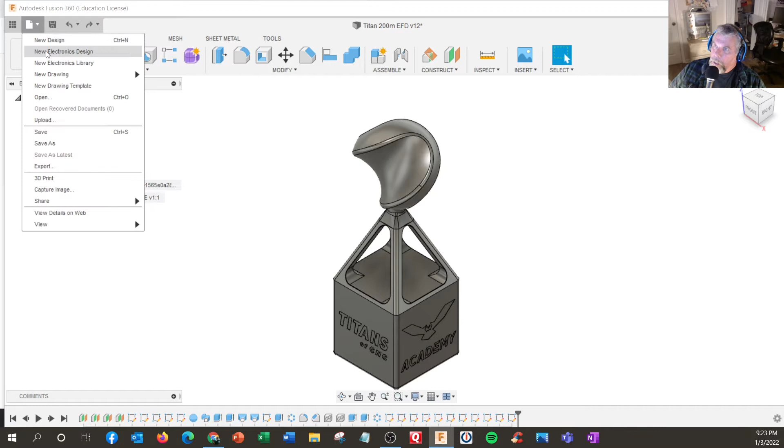I actually already programmed the second side, just like Titan had it. And I'm going to do operation 1. Now...

We have a chunk of material like this, right? And the plan would be, could you machine the whole thing in one chunk? You got to kind of make these decisions. Now, this part is about 9 inches long. So if you were to try to machine everything, and you could program it like that, you would need to hold on to the bottom.

And you need extra material on the bottom. And the options would be a dovetail, which you have to prep and do a dovetail, and that holds pretty good. Or some kind of extra material that like a 3-jaw chuck could hold, or a self-centering vise, something like that. So it's possible, I'd say anything's possible. It's a matter of rigidity.

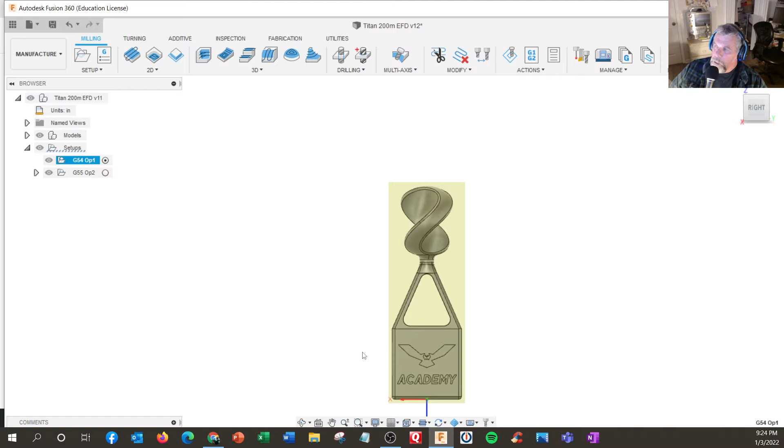So he was suggesting that we do this side first and then put it in the vise, holding on to this, and machine the rest of it. So I'm actually not going to do it like that, split up, and I'm actually going to try to do it as full one operation.

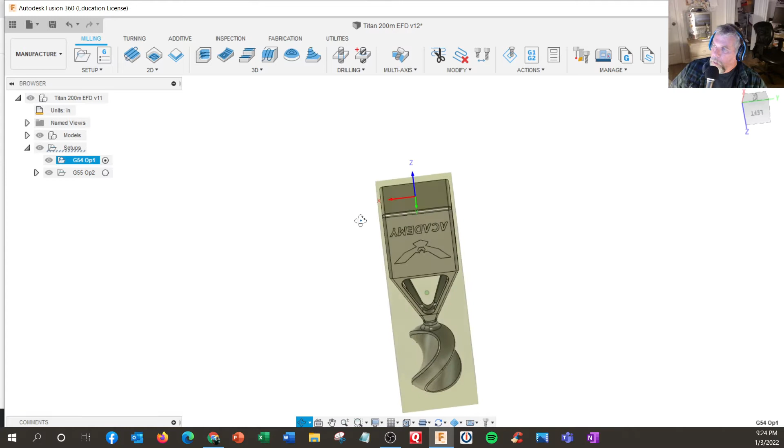All right, so if you do the block first, you still get your material. So what I did is, if I hit the home view, this is my view. So I'm just going to flip it upside down, right? Doesn't really matter which face is where, but so I kind of got ahead of myself.

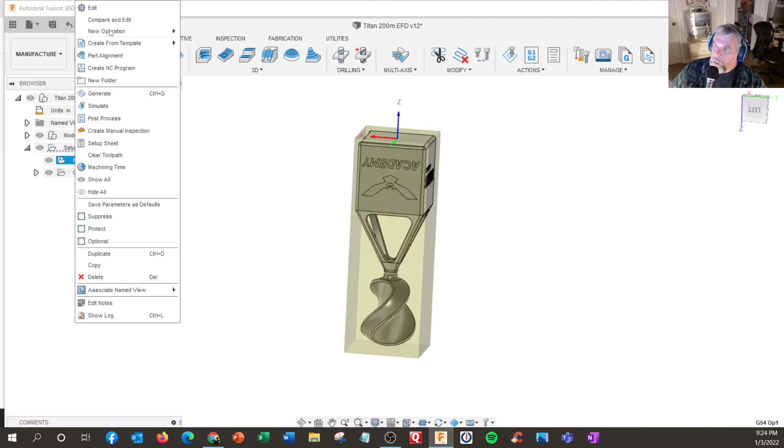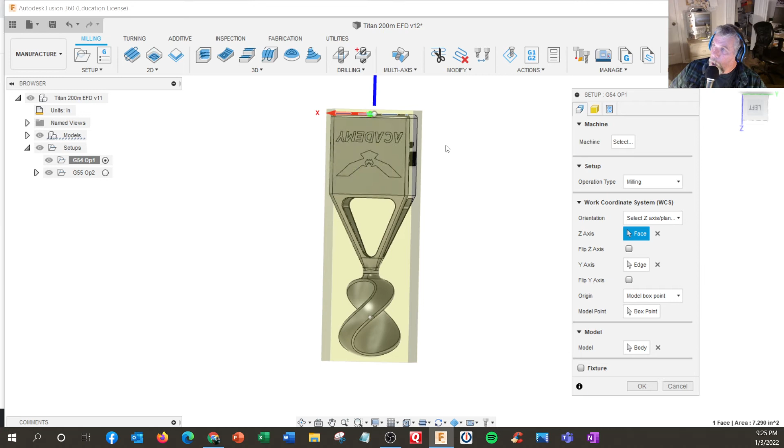I started to do the setup. So in my setup, I go right to select Z and X or Z and Y. And I like the model box point idea because that really means we're in the center and we have to shift down a little bit to get to there. Or if you do stock box point, that means you just, let me click it to stock. It's actually much easier setup. You don't have to shift, but this would be dead center in the middle.

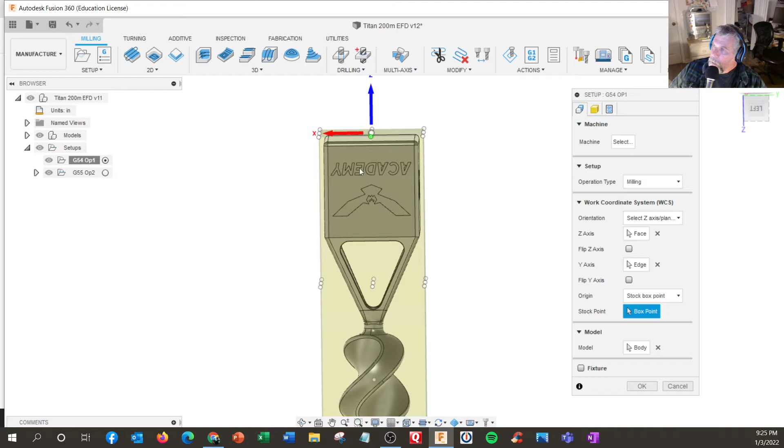So if you had this, let's say, facing you, and you're clamped on the bottom here, and you want to do 5-axis, which means you got to machine the top and 4 sides. And I noticed this has corner radiuses on it. Now you could do 3D mill them, but I noticed in the tool library he had a corner radius, or what we call a corner rad tool. And I'm going to show you how to use that.

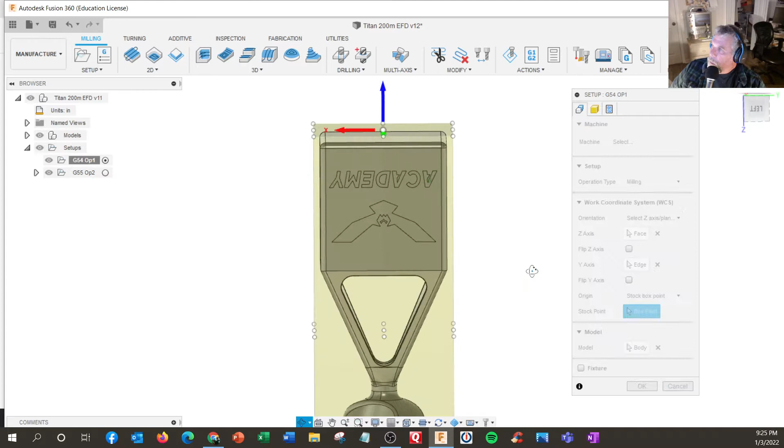Let's see. So what I did is pick Z up, X to the right, but when I go to the, if I have the, where is it here? Sync view, and once I click on this, it'll whip around in the view that I'd be machining it at.

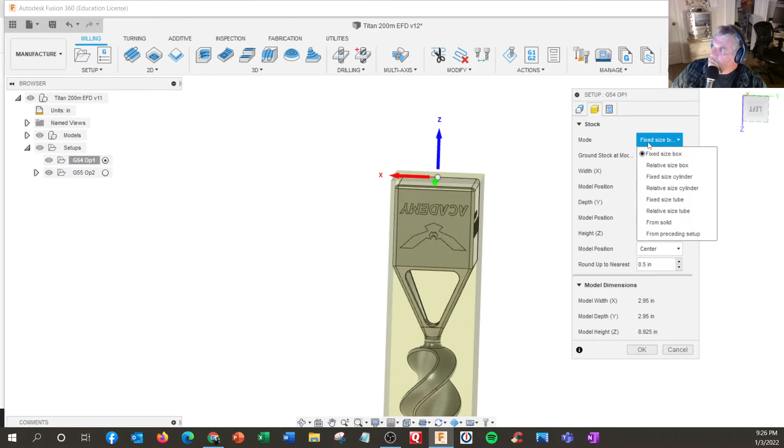And with the other thing I did, instead of using relative size, I just do fixed size box, and I try to pick standard sizes. I believe this part is pretty close to 3 inches, so I made it 3.25, and I made it a little bit longer, 9.25. So if you had square material and you cut it off at 9.25, that'd be a good representation of the stock.

And here I'm also going to put in my Titan 200M Op1.

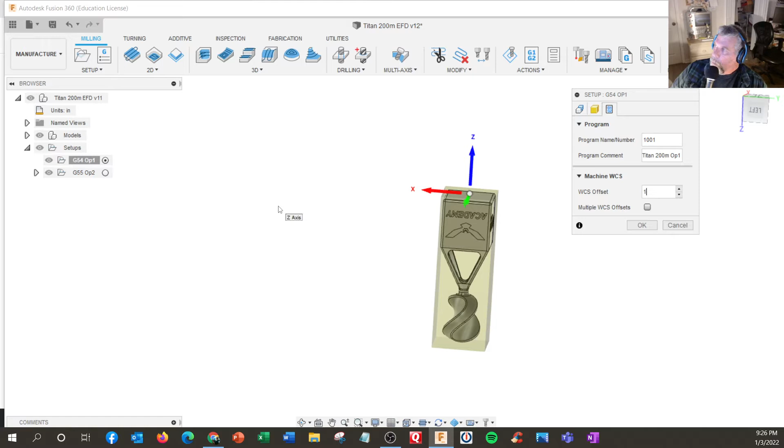And I'm going to call this WCS1. I just want to get in the habit of doing this for the multiple work coordinates. All right, so that is set.

So from this point of view, we could just do a normal face mill on the top. Something we already know how to do.

So I'll go 2D face, I'll go select, and I downloaded the Titan library. Up here is the ones I'm working on, so I already did this one. Let me go into the Titan library right here, cloud. And he's got a 4-flute, 3-inch face mill, and his defaults.

He does spend a lot of time on the RPM settings, but I'm actually going to try to plug these in so we have some numbers. But here's the tool list right here.

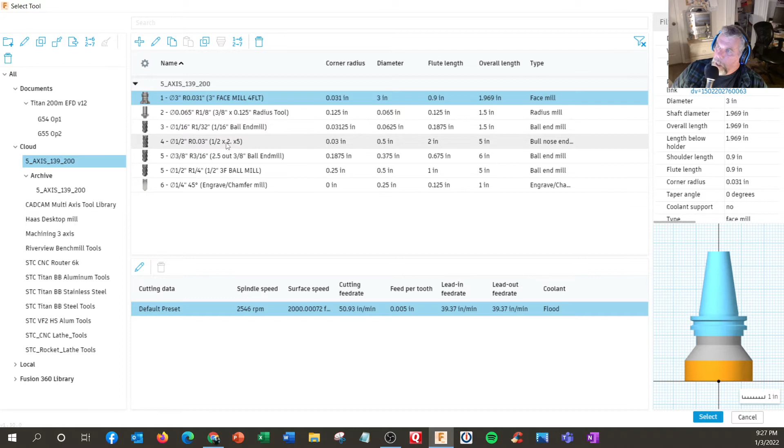You got face mill. This is the corner radius tool. Small ball end mill, 1/2 inch. This is called a bull nose or a corner radius tool. Here's another one that's a ball end mill, a bigger ball end mill, and the old chamfer mill.

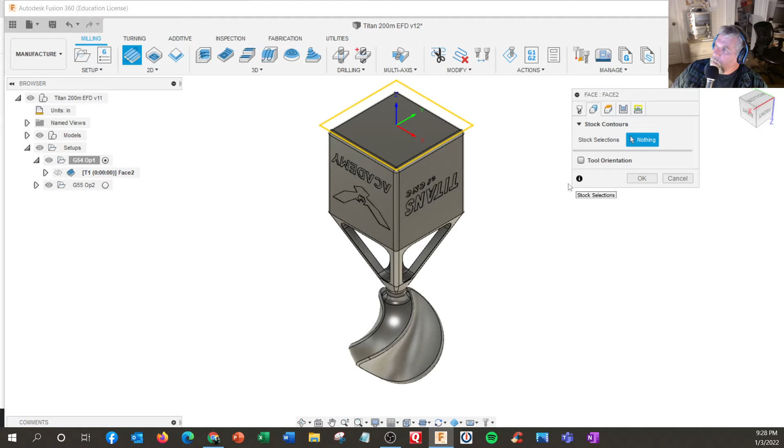Tool orientation, we probably want to start doing this now on all operations. So I'm going to do select Z and X. This is going to be Z, and let's see, X-axis will be something in this direction, and then flip it. All right, so that's done.

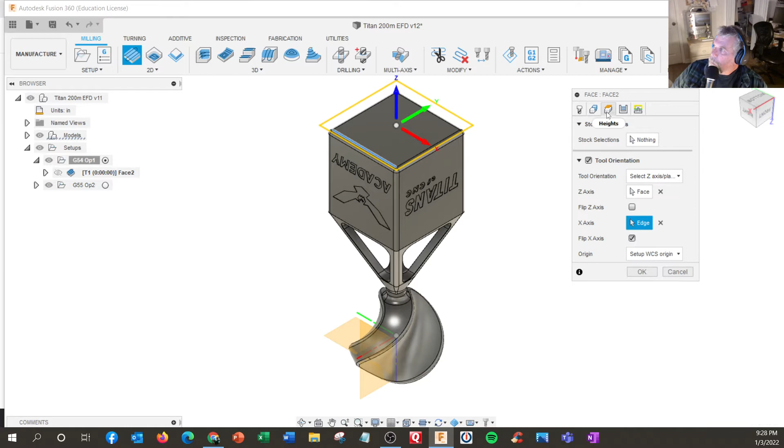Z up, X to the right. As far as if you pick stock height, that's always going to be the safest clearance moves. Bottom top will be the finish line.

We're going to do multiple depths. The standard 40 thousandths is fine. I would add a finishing step.

By default, it puts in the finish feed rate that you had in the other one, but you have control of that, but I wouldn't get into this too much. Chip thinning is actually considered to be an adaptive style of leading into a part, and it's not as aggressive. It's kind of subtle. I'll have to teach you more about that.

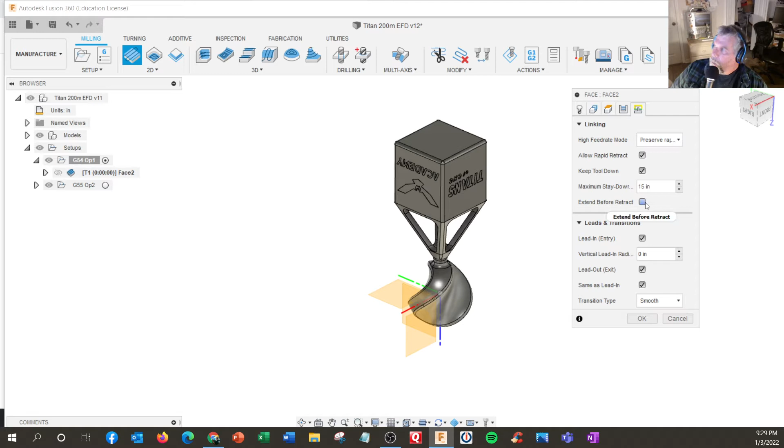Here's one here you always want to use, extend before retract, because when it goes to go off the part, it won't go all the way off. I always make sure I turn that one on, and then hit OK to see what we get. Okay, so this is wider than the face mill, so we got to take 2 cuts.

All right, that looks fine. I think I'm going to do the face mill on all the operations, and then we're going to do the corner radius tool, and then we can do the engrave the features.

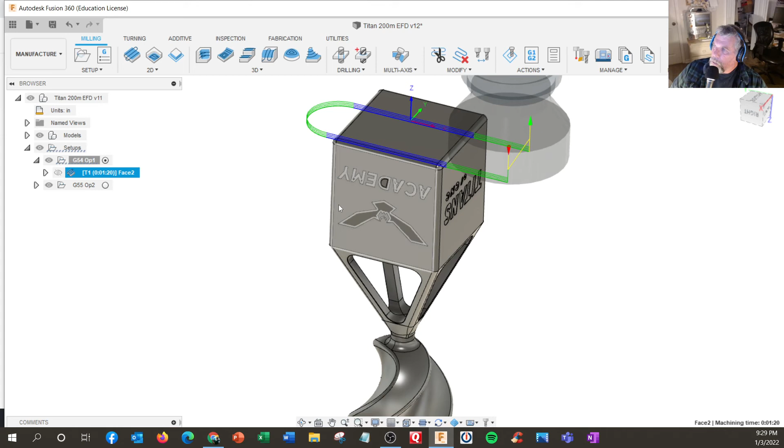All right, so we're going to go, let's see. Let's duplicate this one, right? Now we're going to tilt, all right? So this is our view here, and we want to go like...

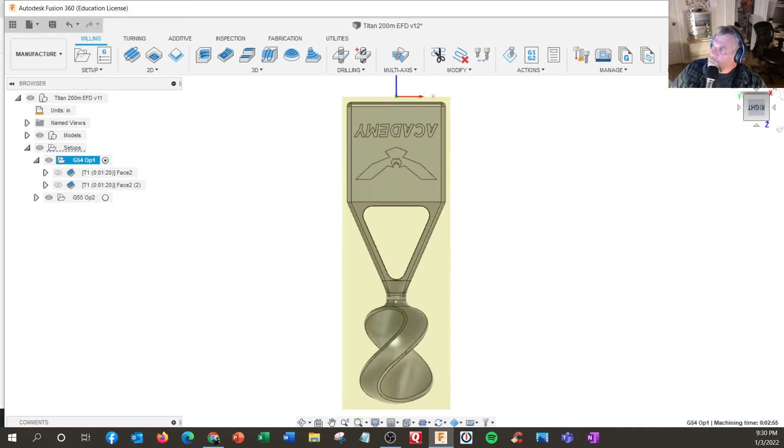I'm just going to use this tilt this way, right? So this will be facing out of the machine, and when I do the simulation, the vise will be on this end, and I'll have to add that in there later on.

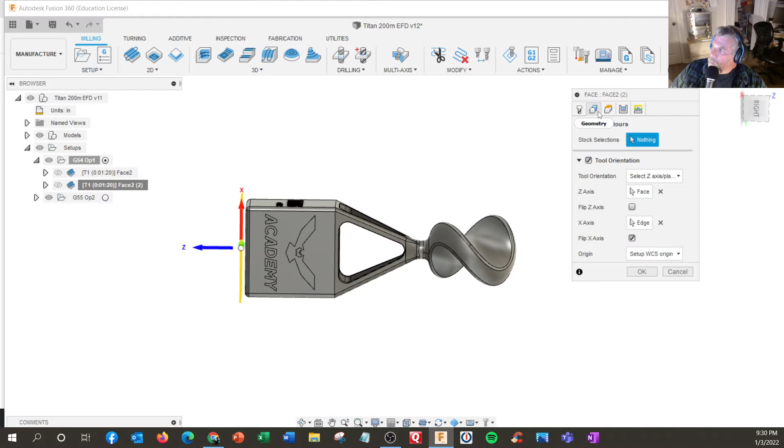We're going to machine this side right here. All right, so that means we got to change tool orientation. So we're going to select, face will be that, and x-axis we want to face to the right.

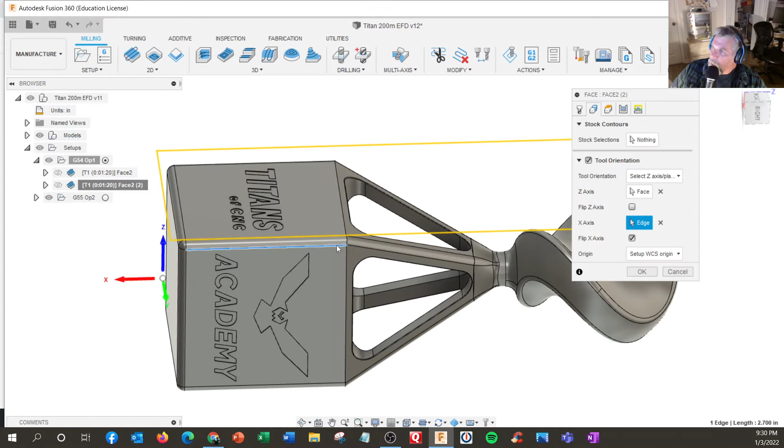So let's pick something that goes in that direction. Okay, the only thing is, nope. Z is the top, and I picked the wrong one. And this is X. So Z is face.

Yep. You don't have to have it on the top, as long as you know where it is. So when this thing tilts, it's going to know where it is. You just want to make sure that Z is up and X is to the right.

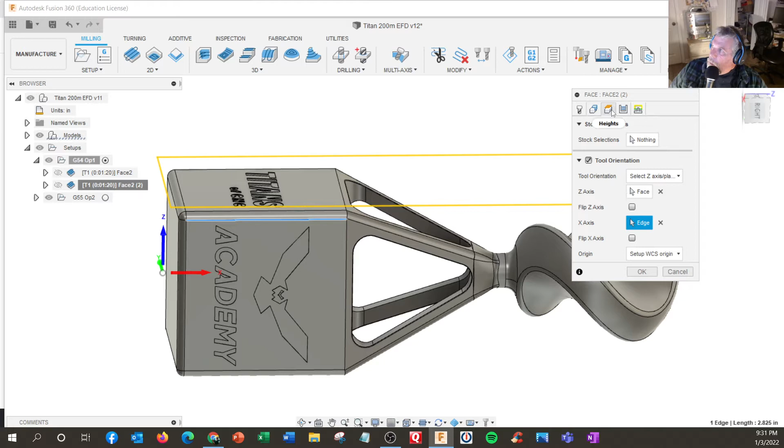Oh, let me get this one more time. Flip. There we go. Okay, everything else has been set, so this should do it correctly.

The only problem is, as tilted, see if this works. It's trying to do everything because it's trying to look at all the material. So the face mill operation is kind of dependent on stock. It's trying to think of this whole thing. And we don't want it to go down here because we're going to be clamping here.

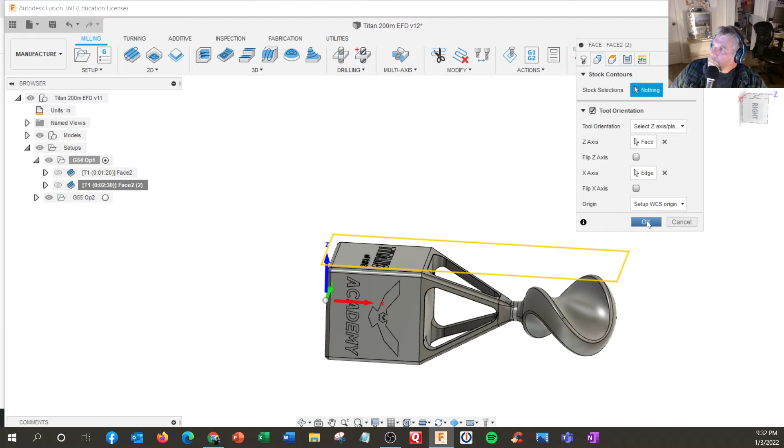So we can limit that a couple of different ways. One would be actually make this smaller, or he was using like building a line and using that as our guide. So I'm going to use that way. Let's go back to...

Design. We're in the same orientation. I'm just going to flip it so front is facing me. I want to draw something on this face.

And, oh, it looks like I got some lines from before. Yes, I do. Oh, these are from previous ones. That's from the other side. Let me see if they're in here. Nope.

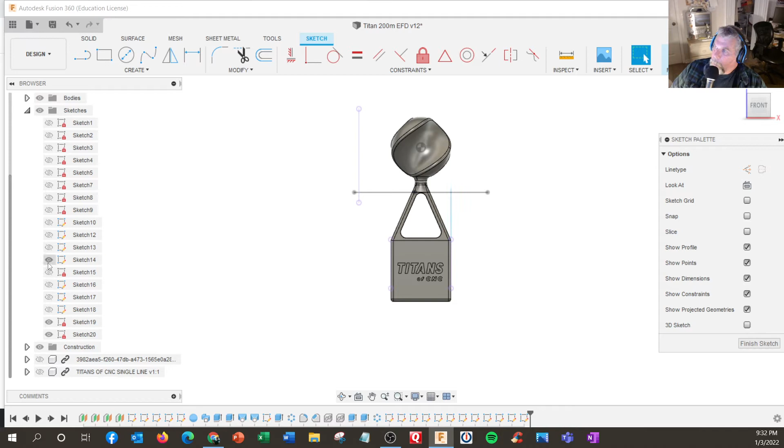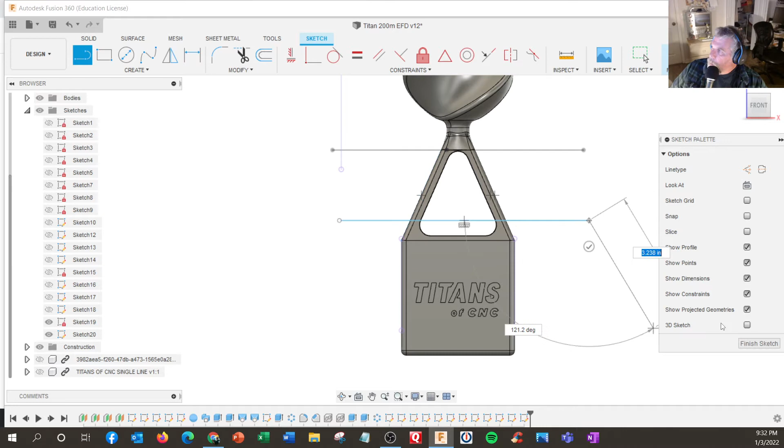I'm just going to draw it in. Sketch a line. It doesn't have to be that exact, because you want the face mill somewhere across here. So I'm just going to draw a line from here to there. We're just going to call that our boundary. Hit escape. New sketch. That would be this one here. Whoops. Turn it on. Okay, that's going to be our guiding line.

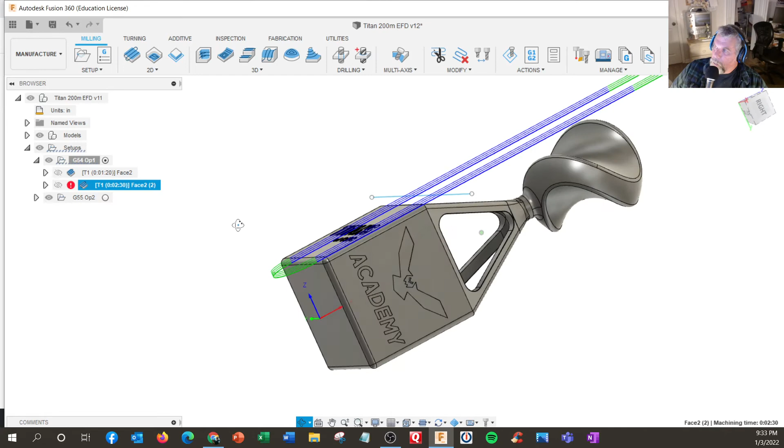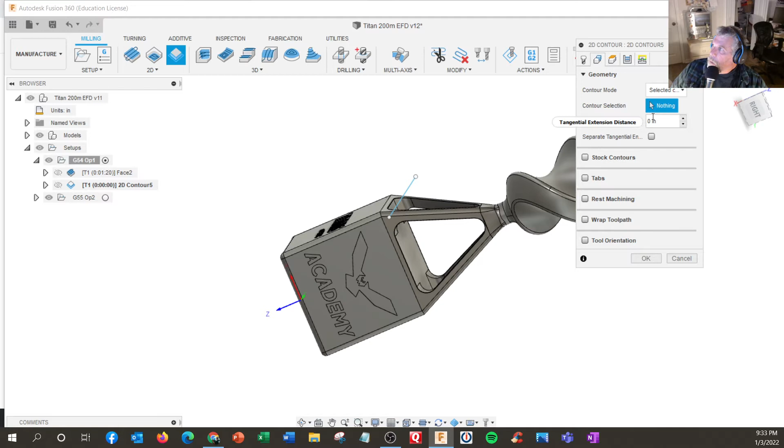Manufacture. Back to here, right? You really can't use face mill when you do this because we're going to use contour. So we're going to delete this one here. Delete. We're going to use 2D contour and just use this as our guide. All right, feeds and speeds are from the previous operation. We have contour selection this way, and we're going in this direction.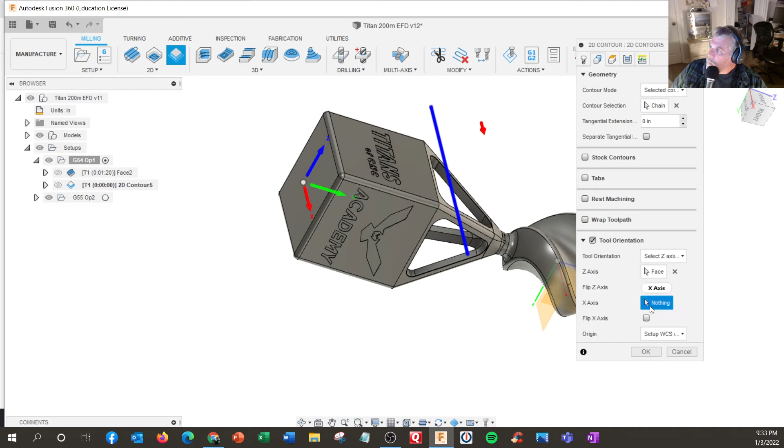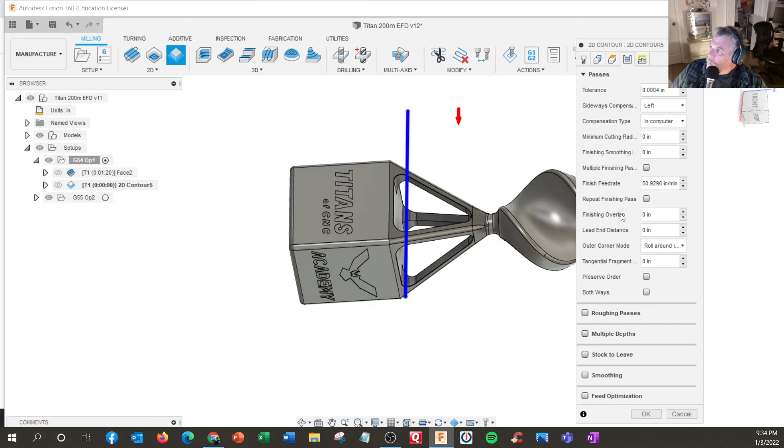Let's see. Orientation, let's get that done. So we want Z to be this, and X to be that way. Okay. And let's not use selected contour. We're going to use model top, which is going to be the top of this. Or you can use selection. All right, we're going to use multiple depths.

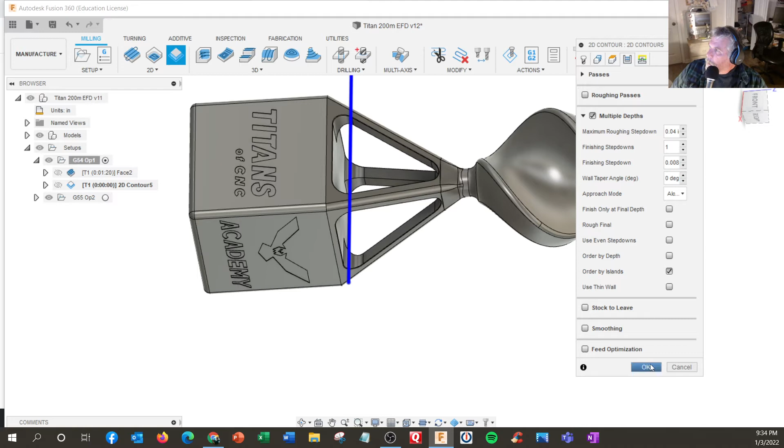Oh, clean this up a little bit here. Multiple depths, finishing step down. Let's just do one. Oh, what's that? Does it say how many? Oh, that's 40 thousandths per. Okay. 1 at 8. Rough final. I'm not sure what that means. Okay. Hit okay. See what we get. All right. Remember, this is trying to treat it like a roughing profile. And what's our warning here?

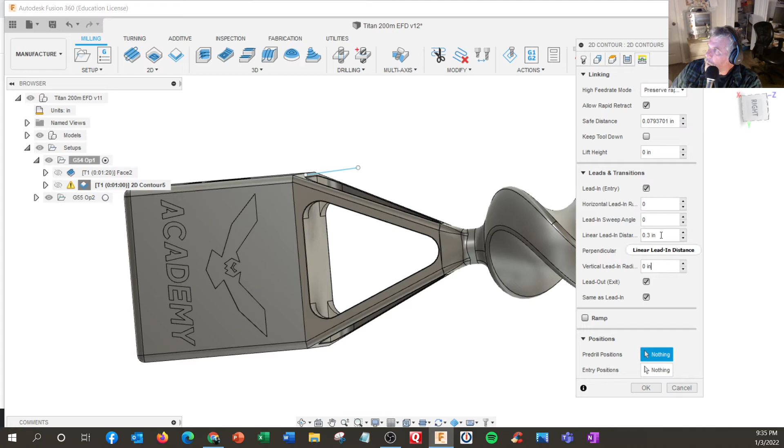All right, so we want to get rid of all these lead in, lead outs, or modify them. I'm going to change this to 0 degrees. Horizontal lead in radius is going to be 0. Vertical lead in 0. And that's linear, so I leave that alone. Hit OK. And now it's more like a straight line on the lead in. It's on the wrong side, though. Let's see. Edit. Geometry. And we want to make sure this is on that side. Okay, multiple cuts.

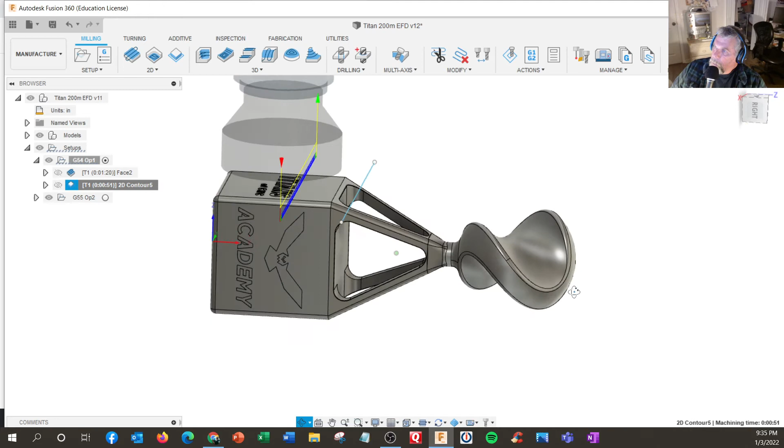Now we're going to do a pattern because it's all exactly the same. We could do the same thing and make 4 different lines. But knowing that this is a perfect cube, we can use pattern to our advantage. So I'm going to say add new pattern to what we have here. And it's going to be circular, meaning that it's going to rotate in a circle. I already have 4 instances lined up, so we already know what the pattern is, and just want to know the axis to rotate it around.

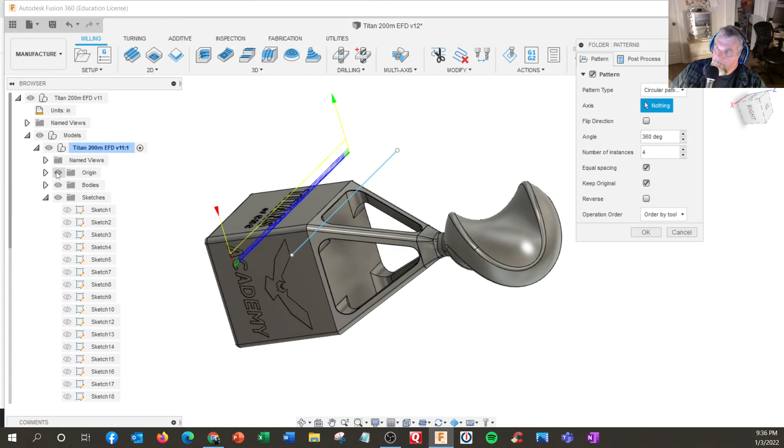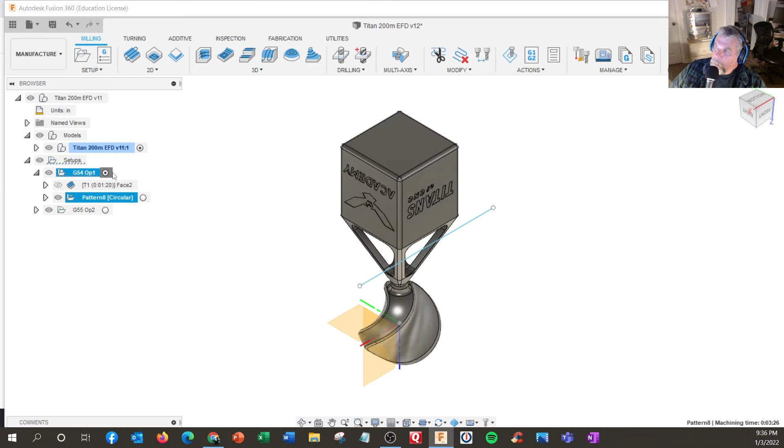So we need to turn the origin on. And we got to rotate around the blue line. There we go. And let me look at this. Nope. Okay. And let me close all of these up. Go back to Op1. That's the top. And let me do the rotated one. Let me tilt this.

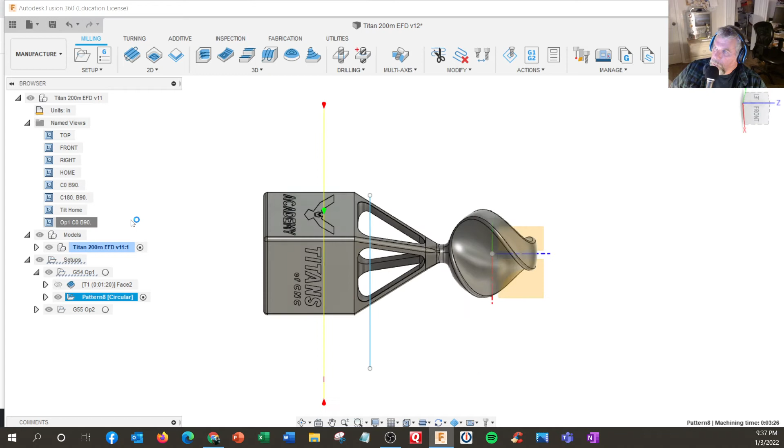I've gotten in the habit of saving views as we go along. So I got Op1. This is my second side, and this is my first side. So this is my rotated operation 1. This is C0 and B90. B90 means it rotated down. Okay, so we got face mill on that side and face mill on this side. Only I'm not sure if this might need 2 cuts.

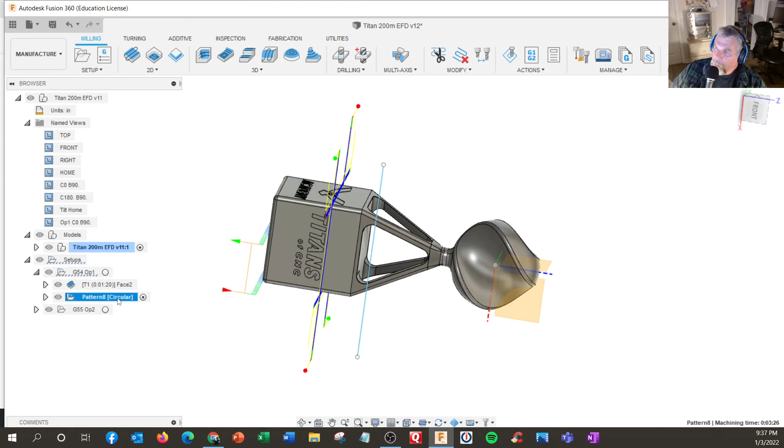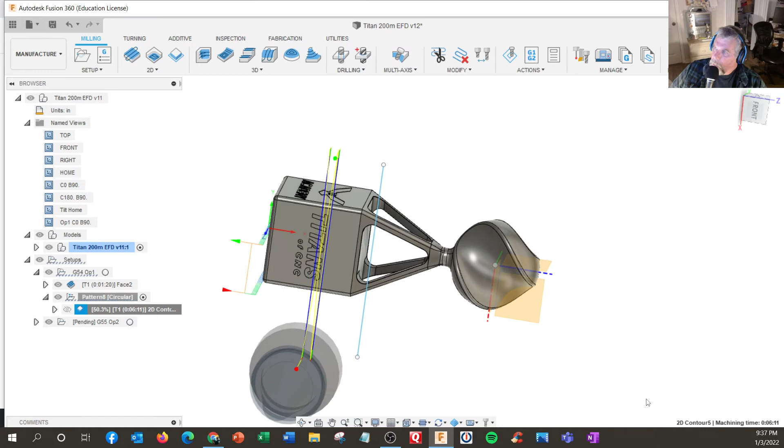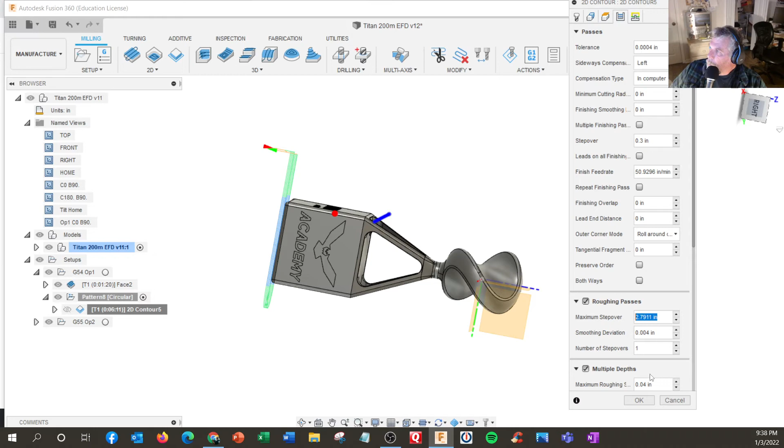So let's change the contour, edit, and roughing passes. That'll be sideways. Hit OK. I think we want to stretch it a little bit more. Edit. Maximum step over. Not sure it's doing what I want it to do. Anyway, let's see what we got here. That'll be all 4 and pattern, right?

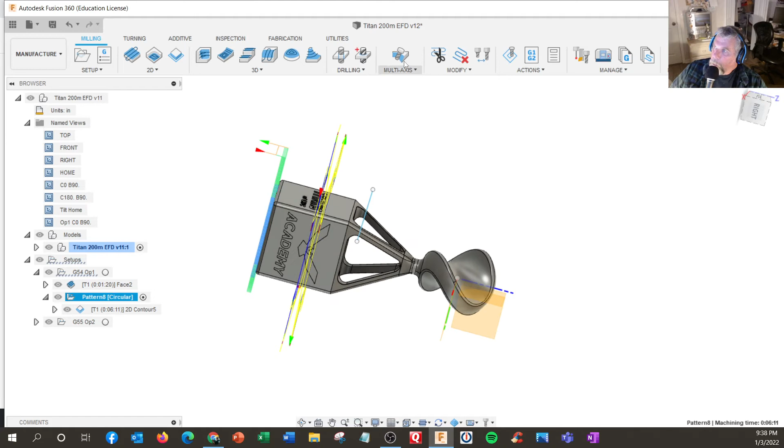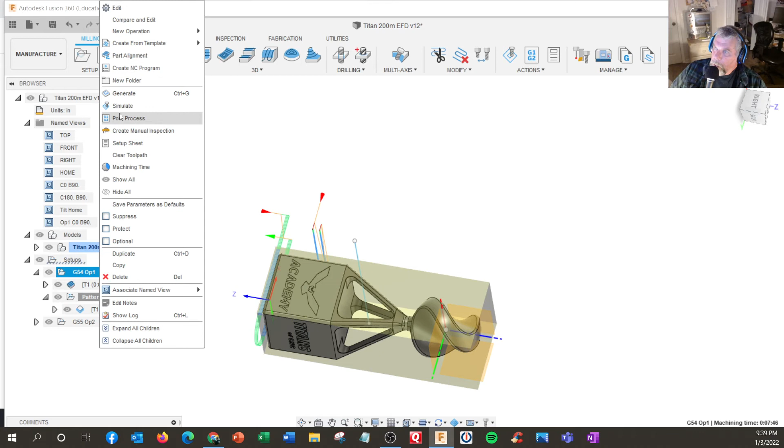Let me do a quick simulate. All right, start simulation. Looks like it'll work. Let's go back to the beginning. Simulate again. All right, so machine the end, machine the sides.

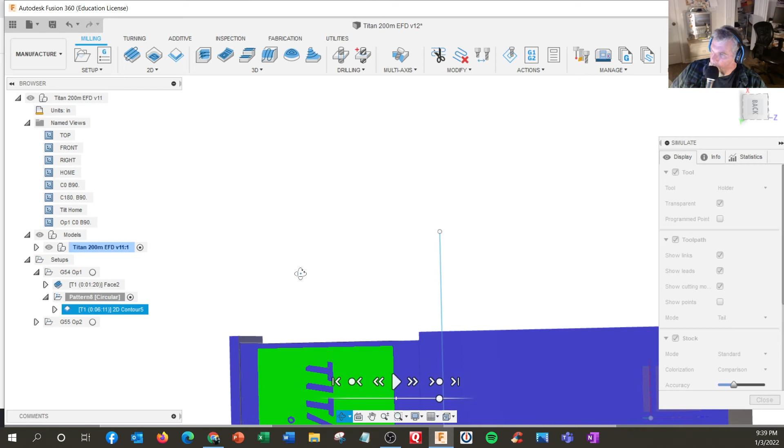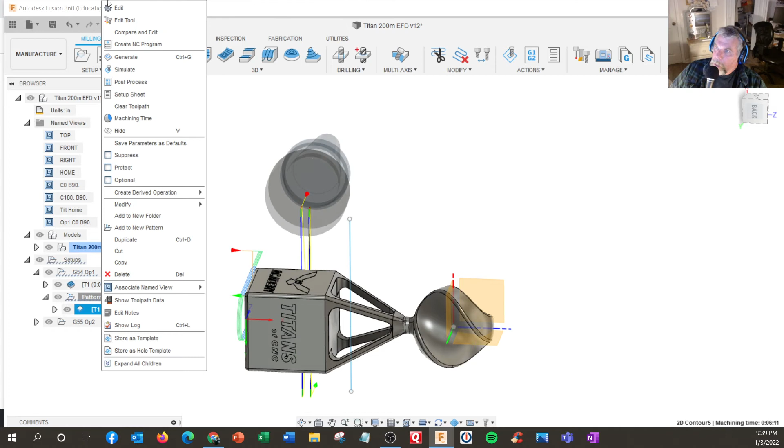So why do we have a big chunk there still? Let me look at the model. I guess, yeah, there's still a hefty amount of the radius there. So let's edit this. Roughing pass. Let's see. Let's step over. Okay.

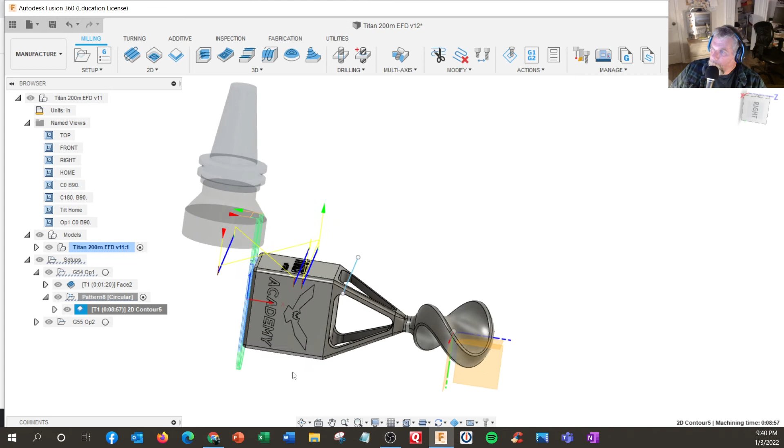Oh, now it's stepped over a ton. Got 2 cuts here. All right, I'm gonna change this to a very small number. I think that'll work fine. Let's go simulate again. Remember, in the simulation, it's not going to flip the way you think.

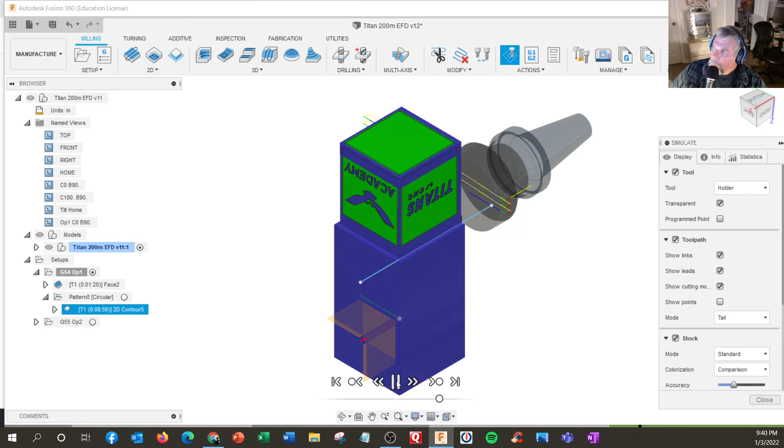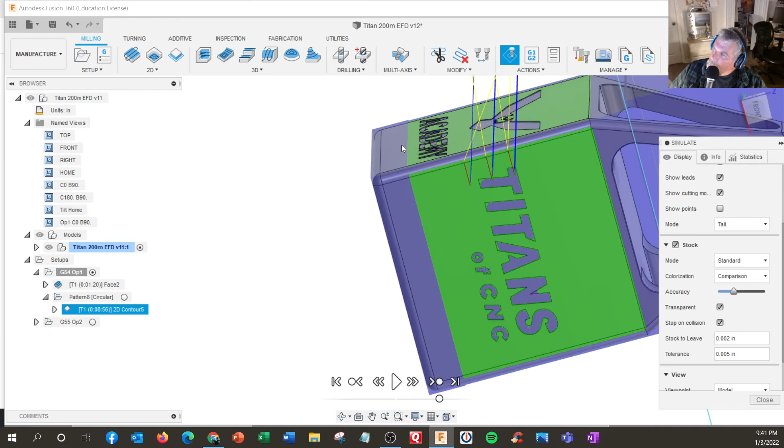Yeah, probably add a couple extra cuts, but not a big deal. All right. There'll be a lot of extra material there. Transparent, toolpath, stock. That's weird. You would think this would be green. Or, okay. Maybe it's just these settings I have it on.

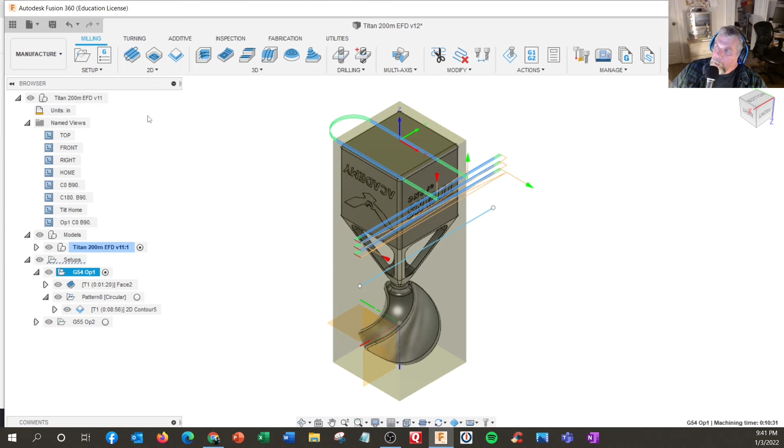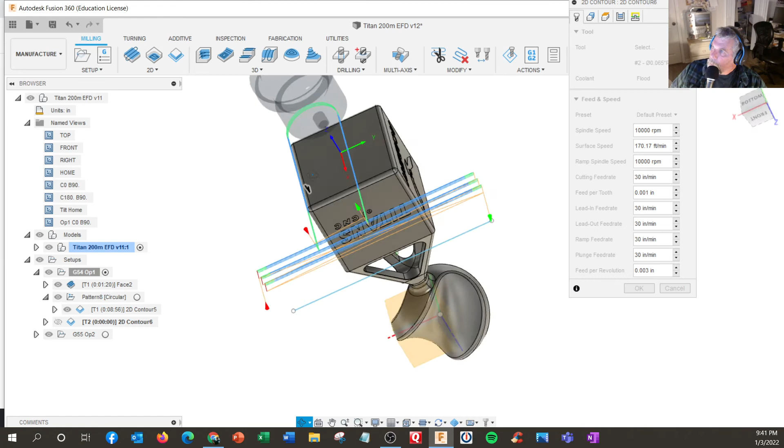All right, I'm going to skip the engraving part, but I'm going to go right to the corner radius tool, which is actually just contouring. Contour, select 139. So I'm going to use the, what the heck is it here? Corner radius tool, and hit select. And I'm just going to zoom up on this tool here a little bit. The shape is, we call this a form tool.

Ooh, let me see if I can use my other Titan mouse here.

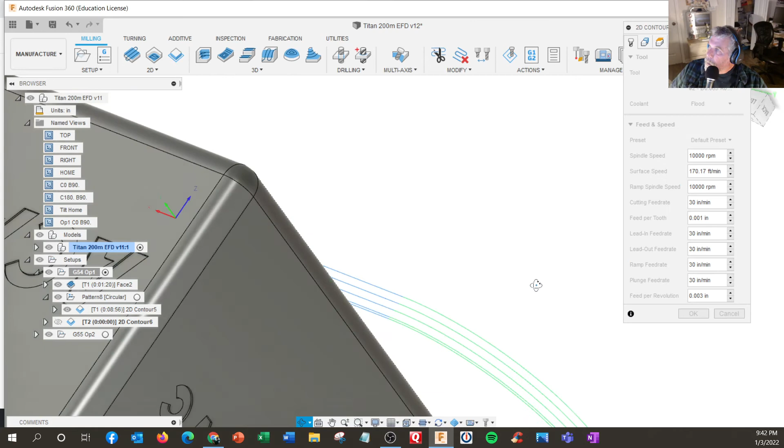So the radius is going to match the radius that's on there. All right, so let me just switch this to tool orientation. If you do setup WCS, that means you're already aligned that way, so you can leave it just as that. Geometry, we're going to select those boundaries right there. I'm going to shut this stuff off.

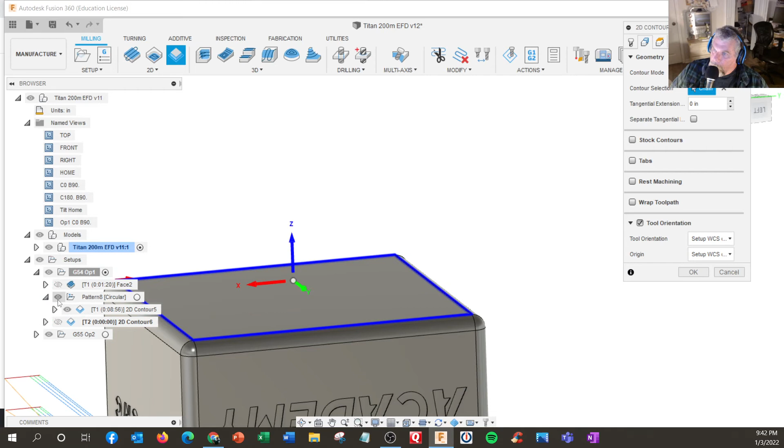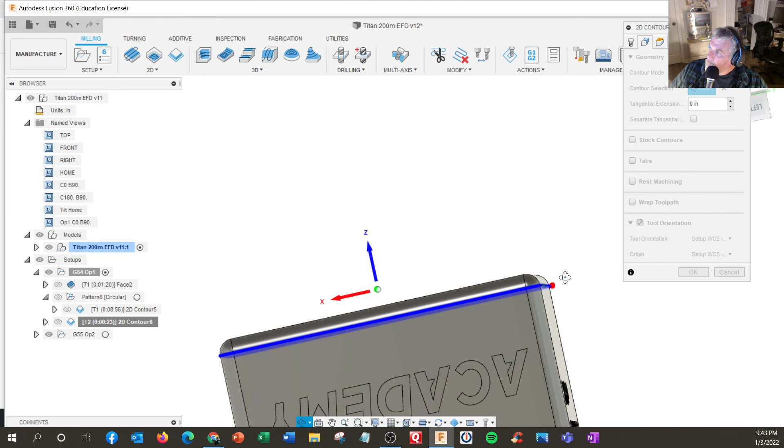Selected contour. And minus 0.125, I believe. And I'll leave everything else alone. Okay. If this generates, looks like it's inside. So you hit edit. Oh, I think I need to be here. So if that's the case, leave this at 0. There we go. This may need some roughing, but we can find out.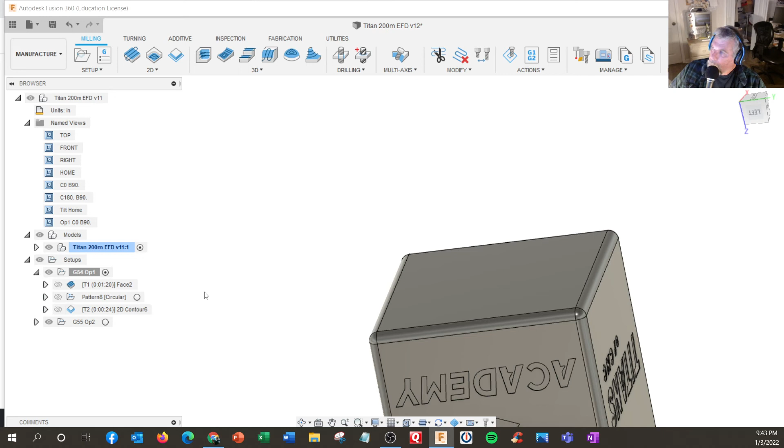And here's a boo-boo I just made here. Oh no, it's working out right. If you do patterns, make sure you don't keep on attaching them. They'll be linked to your pattern. So, all right, let me just simulate that one. See if that comes out right. And step 1, 2, 3, 5, and then press play. Oops, what happened there?

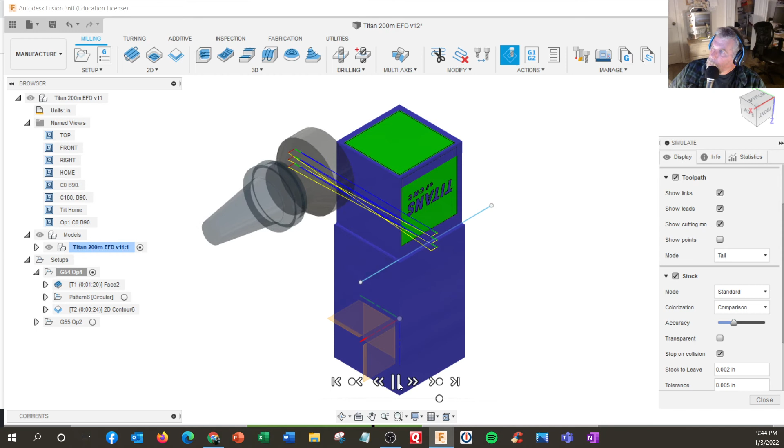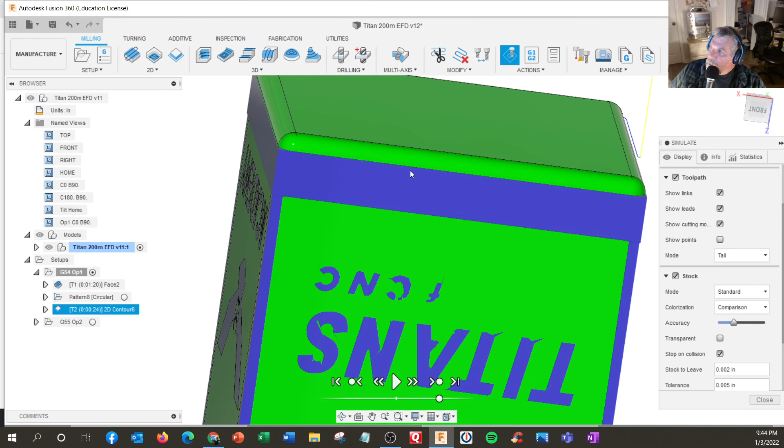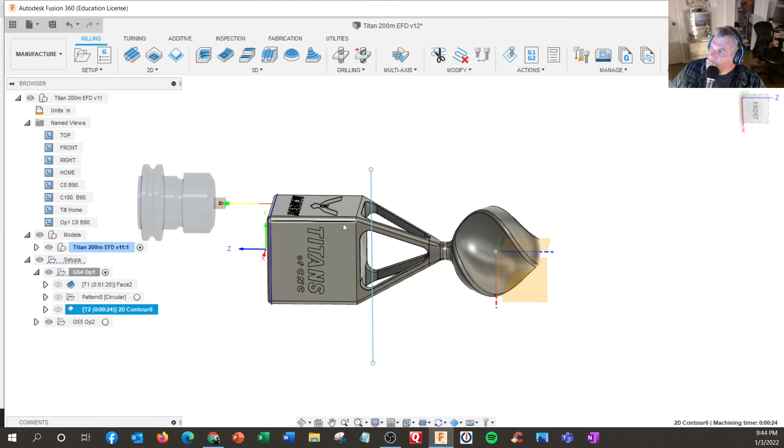All right, so there's that corner radius tool. I'm trying to figure out still why we're getting this extra blue material here, but that's probably got to do with my face mill operation. All right, so we need to do these other ones. Let me go flip this way. And we're going to attack it from this way, which means we don't really need to go around there twice. We could just do this line and that line. All right.

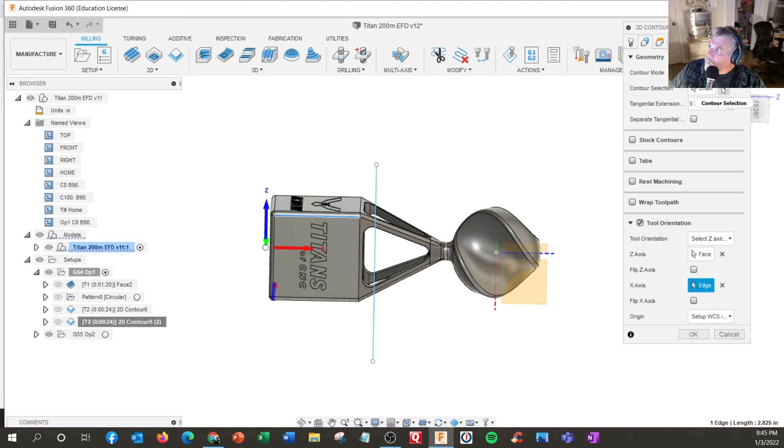You can duplicate that operation because that's the same. Going to change orientation. DX. Want that face to be Z. And you want pointing to the right to be X. And geometry is now going to be, you can pick that line. It just goes around again, but I get worried about blending. All right. And these will 3D machine. All right. Is there anything else I need? I don't think so.

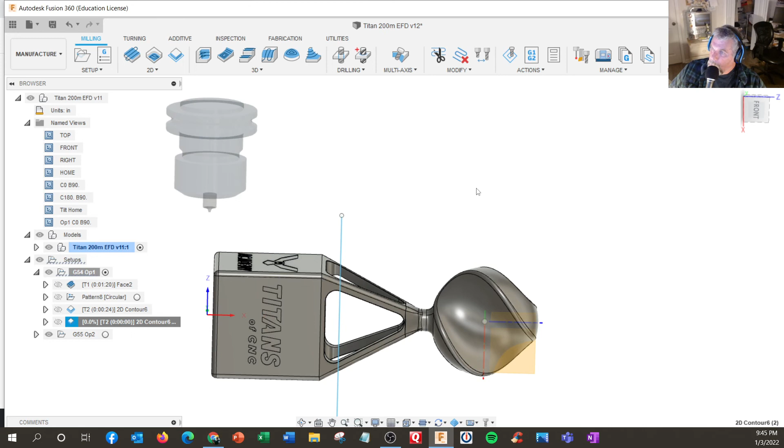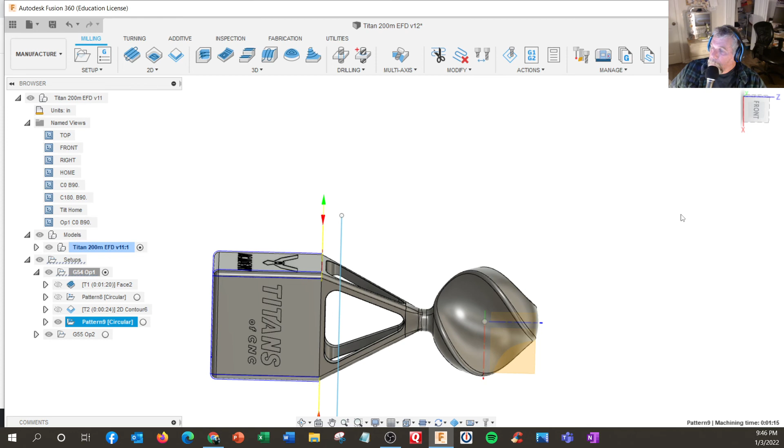So that one we can also make into a pattern. All right, so you got circular. Axis, the blue line, and it's going to be 4 times. Flip direction does not matter. You know, in a way, you don't really need to do it 4 times. So let's simulate one more time, all right?

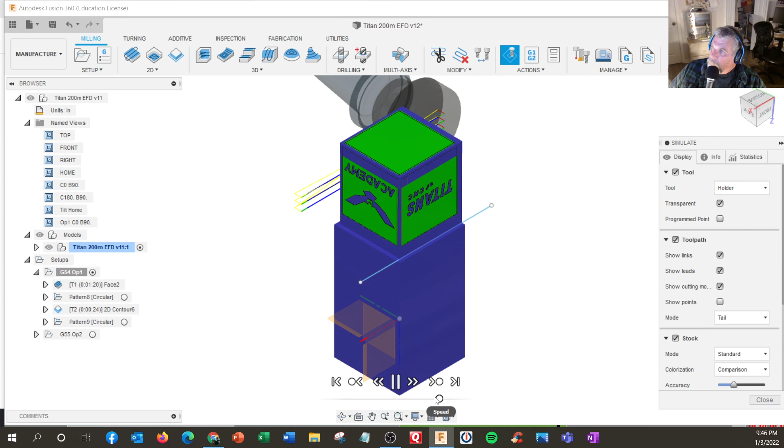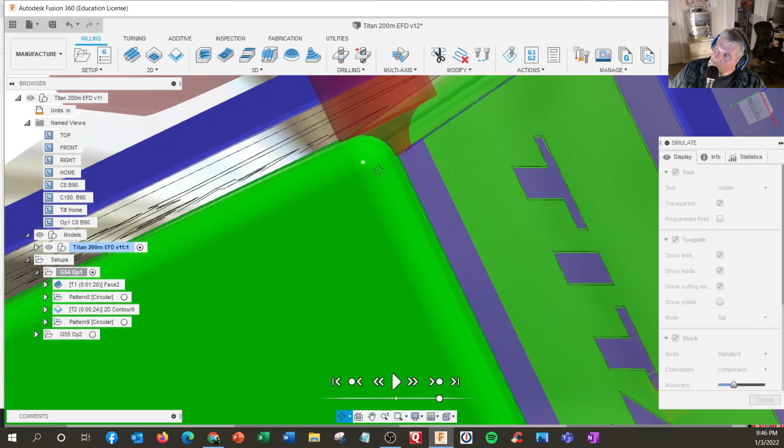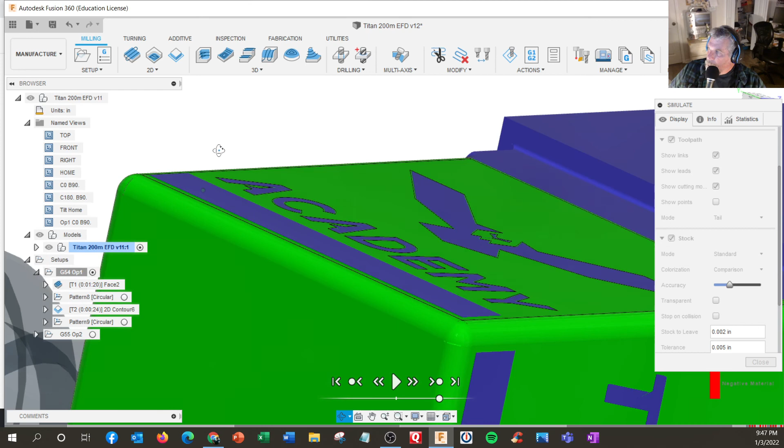I think I took too many cuts on the face mill. Better to be safe. You're better off taking more cuts and replacing stock. Oh, we got a collision here. If you think of it like a chamfering mill, it works the same way. I don't think that's a real collision. As far as the simulation goes, it looks pretty good. These blue things, unless they get machined later. So that would really complete, without doing the engraving, Operation A, I guess they would call it.

So when it comes to post time, up here, I'm not going to use the legacy style first. So we want to use the next generation post. I got it already labeled 1001 and 200M. And right here, you want to click this, and we're going to use UMC 750. And until I update my post processor, we want to turn on preload tools, yes. Use G0, we want that to be on. And we want DWO.

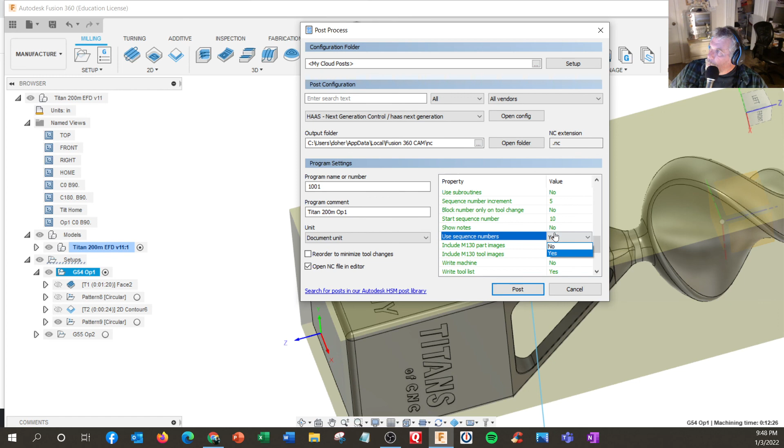And what's the other one? I like to get rid of sequence numbers. So I want no sequence numbers. Post. Save. And make sure the code comes out right. Yep. So we got right there. Titan 200M, Op1, tools. These are unclamp axes, rotate, clamp, turn the coolant on, machine, get tool 2 ready. This will machine, and then it actually goes to home, flips, and starts machining and flipping.

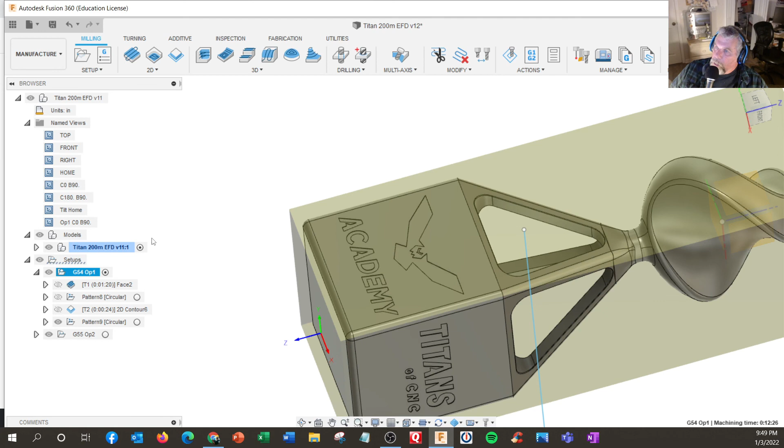Okay, they'll actually have B and C rotationals. All right, it's about 12 minutes, but I think it's well spent. So then I'll get on to, I really did the G55 Op2 side just like Titan did it. So using this multi-axis, and in this one, flow actually already has multi-axis in it. Let me turn that on. There's been some upgrades since then. Right here, flow.

Oh. Right here, steep and shallow and flow have the multi-axis switch. And later on, we'll learn to use these other ones. The other ones will be a 3+2 strategy.